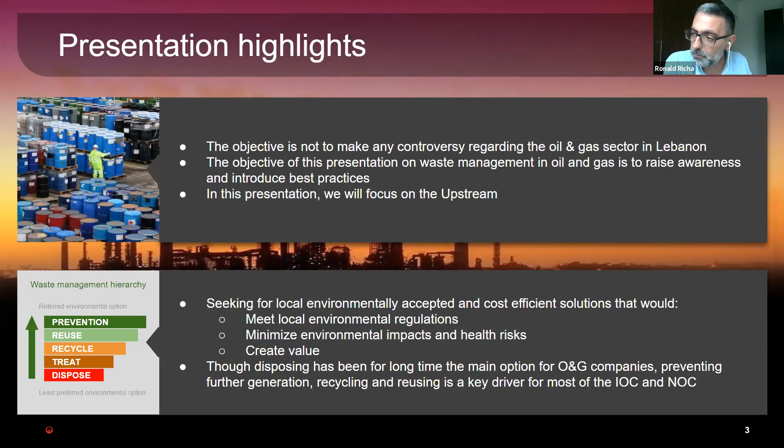So these are the fundamentals, the principles I wanted to start my presentation with before I address the rest of it. What is the oil and gas value chain or oil and gas sector? There is the first, what we call the upstream. The upstream is the exploration and production of oil or of gas.

This is where we have these oil fields or gas fields, where the oil companies, whether national oil or international oil, you can see all these rigs and all these wells, oil wells, where we go very deep to extract the oil or extract the gas. This is what we call the upstream. It could be conventional or non-conventional.

Then when it's extracted, this oil or this gas should be treated. When I say treated, cleaned. We have to remove the salt, we have to remove from the oil the water, other type of things. From the gas, we have to remove the sulfur, we have to remove other type of impurities. And this is what we call the middle or the midstream.

Then we have the refining. So there's the storage, then the refining, where we start separating the different molecules inside the oil and recombining them. Then we have the petrochemical, and then we have the chemistry. So oil and gas, it's a very, very large definition. For each and every step of the oil and gas sector, we can find specific challenges linked to waste management, linked to water management, specific environmental challenges.

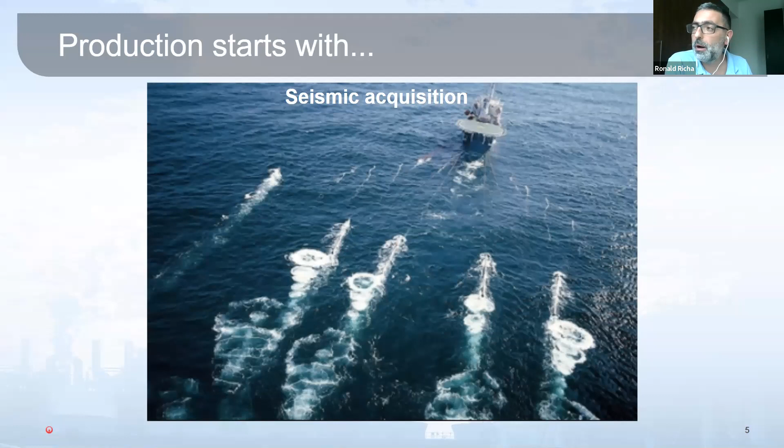First things first, a quick reminder. Everything starts with the seismic acquisition. It's all technologies consisting of sending shock waves in the soil layers and having probes to capture these shock waves and to analyze how these layers in the soil are composed. The porosity, the type of rocks, the type of reservoirs, the densities, and so on. So this is the seismic acquisition, and this is what has been done in Lebanon.

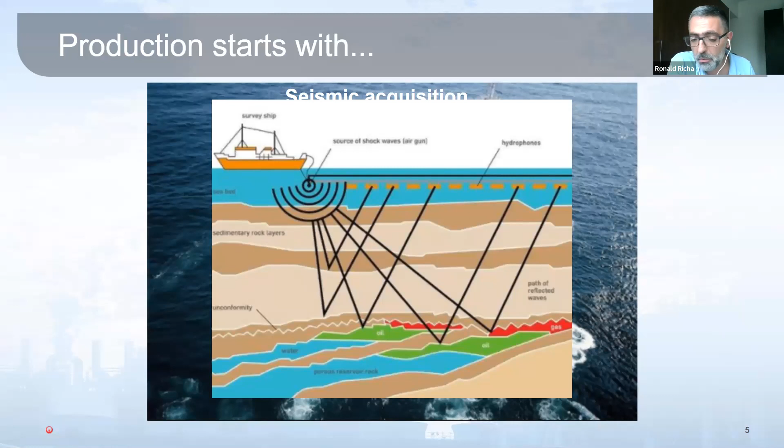And it gives a probability. It shows that, yes, in this area, there might be a reservoir. And this is where geologists come and have a lot of theories and start doing some studies about the geology of the land, and when it was made and so on. But nothing happened until the exploration started. Why am I saying that? Not because I want to focus on oil and gas. All these steps mobilize a lot of people and equipment and products and consumables and so on. So they generate a lot of waste.

This waste could be general waste, because there are people. For example, onshore, I've been involved in the development of one onshore field. At a certain point, there were 15,000 people in the development of this field. So all these people, they have showers, etc. So they generate general waste, but also to develop an offshore, there is the drilling, and we'll talk about the drilling. There's the fracking process.

The fracking process consists of fracking the rock in order to extract gas. There are a lot of processes that can involve either water or other types of chemicals and generate water or other types of waste. So these steps are important to understand, and to understand what happens during these steps in order to be able to address the waste that can be generated and treat it.

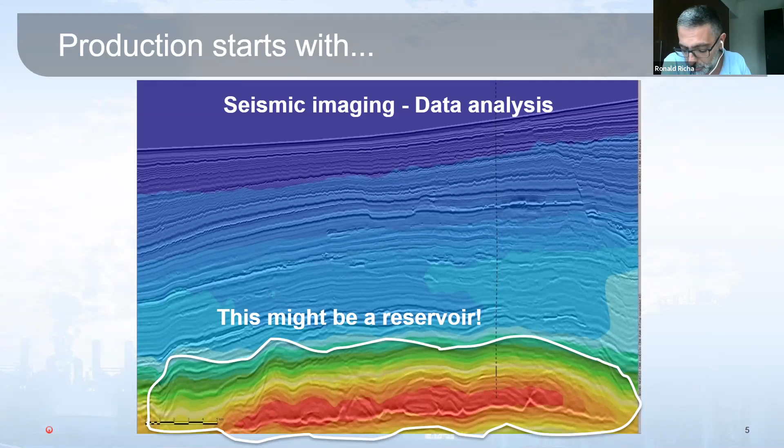Then the phase of exploration starts, and with the phase of exploration starts the drilling. We'll talk about the drilling later on. And we discover gas or we discover oil. So we start managing the reservoir. We manage the reservoir by injecting gases and water to keep the pressure and to enhance the pressure, and by using pumps and by extracting the oil and the gas. So these are processes that most of the time use big quantities of water and different types of water.

There are a lot of technologies in oil production, for example, where we maintain the pressure of the reservoir by injecting water. The water could be fresh water. It could be salt water. It could be what we call the low salinity water technology. So we have to prepare a kind of specific salinity water and inject it. It could be steam. So these technologies could use huge amounts of water, and can have a huge environmental impact. When you say using water, it means pumping from a water aquifer or lake or river or whatever, and producing a lot of water that could be polluted.

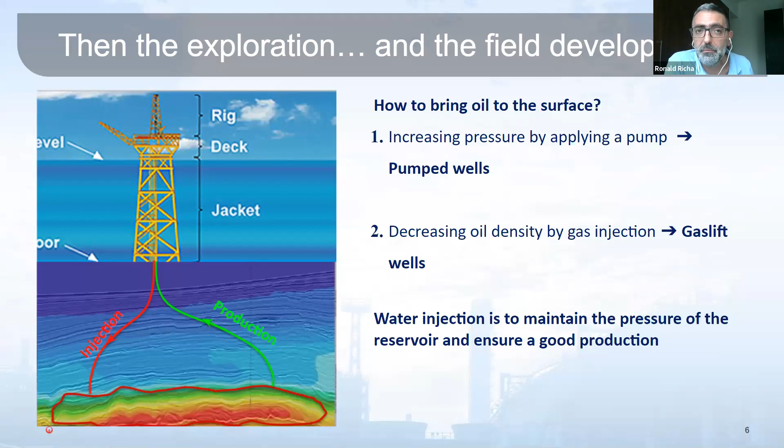So basically, these are the main principles. Now, if we come back to the drilling process, the drilling process is a complex process. The principle is simple, but the drilling itself is a very complex process. Because first of all, it could be vertical and horizontal. It can take any direction. Second, it can go very, very deep, 1,000, 2,000, 3,000 meters. Even more sometimes in non-conventional areas, but also it involves many things at the same time,

which is the head of the driller that is crushing the rock. Inside the drill bit, we inject mud. This mud could be oil-based or water-based. This mud has three roles. The first role is to control the temperature at the drill bit. Since there's a lot of friction, there's high temperature. The second is to stabilize the well so it doesn't collapse. So this is why we put in this mud some specific components like bentonite, for example.

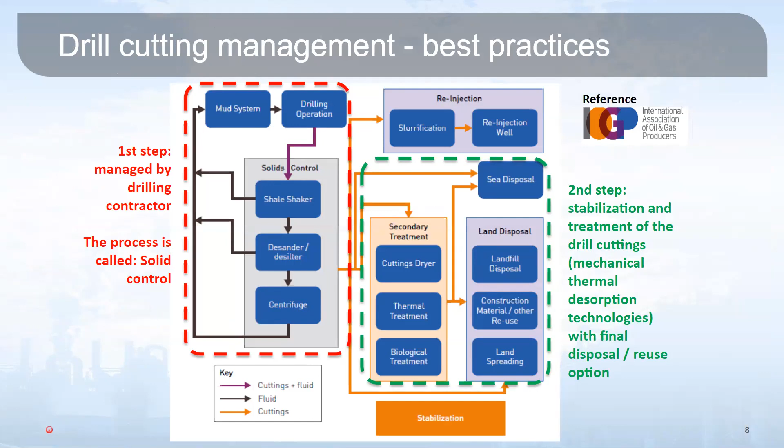And once treated, it's a little bit technical, but what I wanted to show you is that we can reduce the quantity of mud by recycling this mud in a closed loop, and whatever remains in terms of rocks, cuttings, and so on, we can use a technology called thermal desorption in order to clean this solid matter and make something out of it. In Veolia, we have a lot of experience in that, and we mainly produce construction material out of it.

The bentonite that we put inside the sludge is a very fine material with very good characteristics. It's a kind of clay. It can create smooth surfaces. So we use it as a construction material. We use it for parking lots, for a lot of things, but we need to stabilize it. It can also be used as fillers for roads and for embankments and so on.

We also have experience where we created bricks out of this kind of material. There are a lot of things we can do with it, and a lot of opportunities for the treatment of such material. First of all, in terms of lowering the environmental footprint, and second, in terms of producing these byproducts and sometimes selling them or giving them for local use.

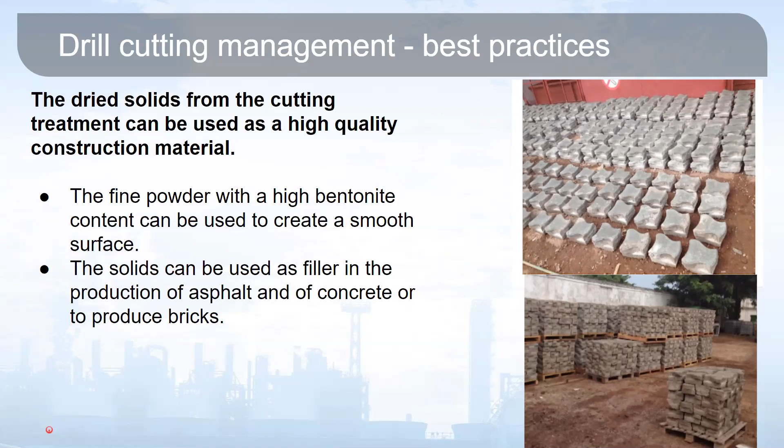The second interesting and challenging aspect, and I think not a lot of people know about it, is what we call NORM. NORM is the terminology for naturally occurring radioactive material. Yes, there is some radioactivity that we can find in oil and gas. We're not talking about nuclear bombs, and it's not everywhere.

It can be in some specific fields, depending on the earth layers, the earth crust, and the presence of these radioactive elements that are naturally present in the earth crust. In all the earth, in all the layers, there is some radioactivity.

The problem starts when we have this accumulation phenomenon. In the exploration phase and in the production phase, we are extracting the oil, and with the oil there are sands and soil that come out. All these components go to what we call GOSP, the gas oil separation plant.

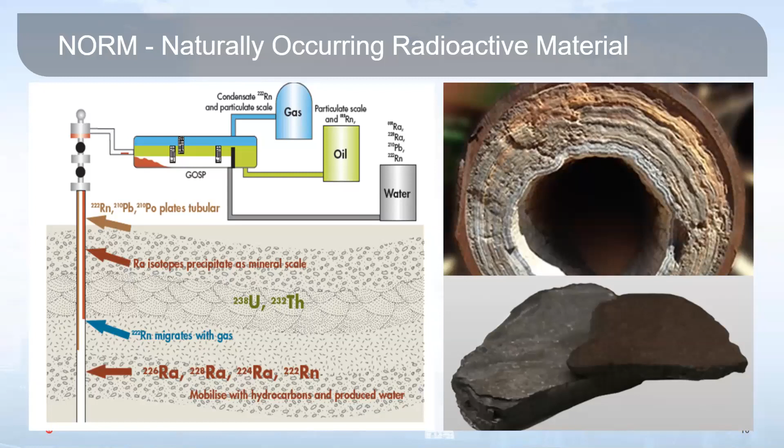This is where we separate the oil from the water and from the gas. There's also a solid fraction, and everything goes through pipes, and scales are developed in these pipes. These scales are exactly the concentration phenomena where we concentrate the radioactivity, and after a certain level it becomes dangerous for people.

Radioactivity is a matter of radiation, times time of exposure, times the type of radiation. So if it's very low radioactivity, in some cases just a few becquerels, it's also a matter of exposure. If the same person is exposed over a long period to this radioactivity, it can be harmful for them.

This is where oil and gas companies, and we can see it even here in the Middle East, companies like ADNOC and others, are very concerned about these challenges, and they have put in place specific solutions to detect, monitor, and treat this radioactivity inside the pipes and all types of equipment. This is more and more recurring as we go very deep, into different soil characteristics and so on. We can have radioactivity, and over time this radioactivity will become concentrated and become harmful.

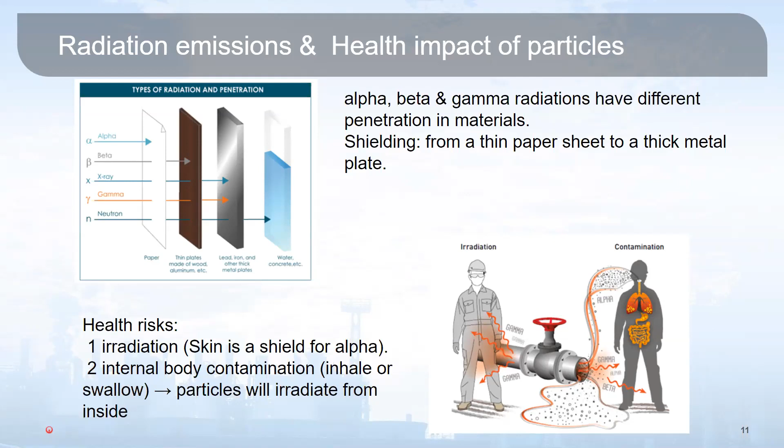So what are the solutions we bring in this case? First of all, there's monitoring. We need to measure, we need to see what the level is. The World Health Organization has defined some thresholds. Once again, we're talking about very low radioactivity, but there are thresholds that the WHO considers as challenging, as could have some harm and generate risks to people exposed over a long-term period.

So we start by monitoring, by testing and segregating what is contaminated from what is not contaminated. Then we protect our people, for sure. Like we see today with COVID-19, there are protections to be taken. So for radioactivity, same thing.

Then we descale, we treat. As we saw before, the radioactivity is on the scale, so we try to remove the scale, we try to concentrate it, and we try to treat that equipment to bring it back to the oil and gas producer. We concentrate the sludge, or whatever comes out of this radioactivity, and we dispose of it safely, or we incinerate it. This is another challenge we can face when we talk about oil and gas. It's not systematic, it's not everywhere, but it could be the case in several fields.

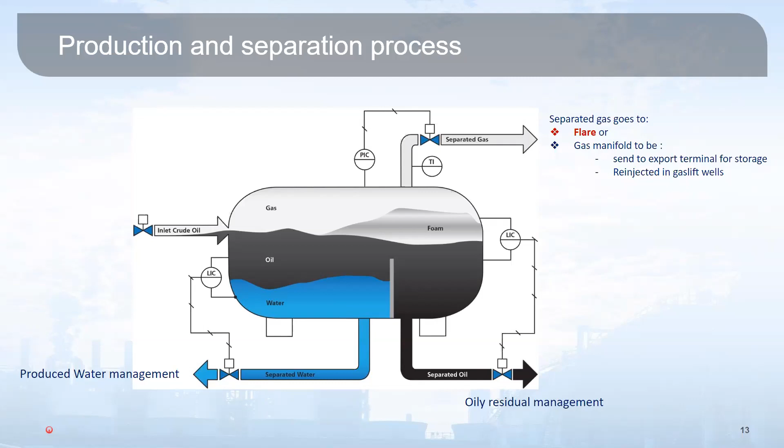Yes, there's water coming out with the oil, and sometimes there's a lot of water coming out of the oil, and this water needs to be depolluted, and we need to find something to do with the water, because you might see in some cases a huge amount of water coming out. And we have the solid part, which is the sludge.

For the sludge, there are a lot of solutions, and the sludge could be generated in the GOSP, or could be generated also in the terminal, in the tankers, in the tanks, or storage. There's a lot of technologies and ways to deal with the sludge. What's important, first of all, is to separate the water from the solid from the oil.

This is what we call the tricanter technology, or centrifuges. Once we separate them, we can send back the oil to the oil and gas company. We can use the soil, send it to thermal desorption, for example, and use it as construction material. And the oil could be treated and used for other purposes.

There are others, mainly in refineries, Veolia has developed different technologies and expertise in order to use the different phases of the sludge inside the refinery and reduce the quantities of solid to be disposed in landfills. Because, as you know, almost everywhere in the world, the cost of landfilling is picking up. It's becoming more and more expensive to send waste to landfills, and this is why oil and gas companies are trying to find alternatives, not to send waste to landfill, and try to recycle on site.

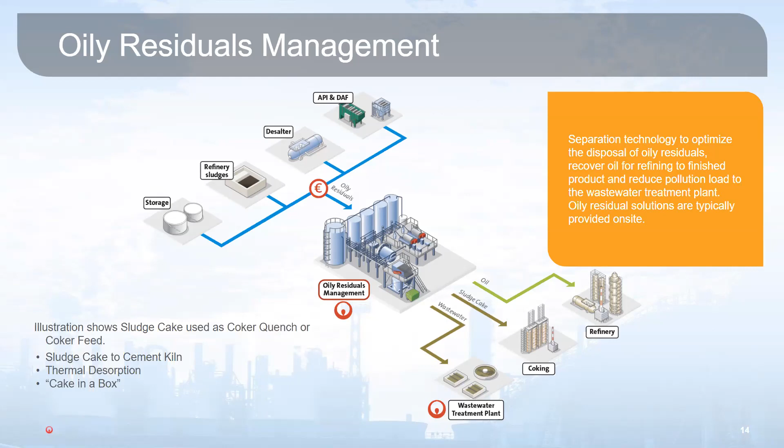So this is for the produced water, and I find this very interesting. For example, the closest to us is Oman. In Oman, what is the water to oil ratio? It's the quantity of water that we produce every time we produce 1 barrel of oil. In Oman, the water to oil ratio is today around 20. So for 1 barrel of oil, Oman produces 20 barrels of water.

I was in a conference one year ago, and there was a CEO of one leading international oil company saying, are we oil producer or water producer? Because there are some fields, some aging fields, that are producing much more water than oil. And they need to find a sustainable solution, because this water contains a lot of contaminants - oil, other contaminants, and sometimes high quantities of salt and big amounts they need to deal with.

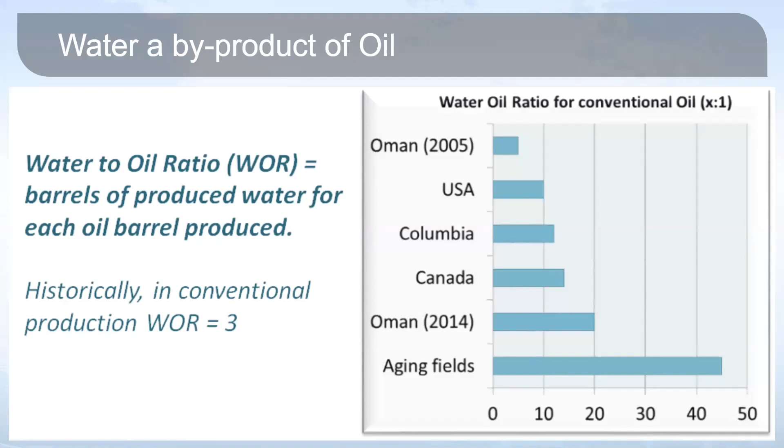So if we consider today the overall worldwide production of crude oil, around 80 million barrels per day, with a water to oil ratio of 3, roughly 40 million cubic meters per day of water. If we consider that in 2030 the current fields will be aging and producing more water, roughly 500 million cubic meters per day of water will need to be managed. 500 million cubic meters per day is the consumption of 2 billion equivalent inhabitants.

It doesn't mean that we'll take this water and send it to people to drink. No, that's not what I want to say. I want to say that it's a big challenge that the oil and gas companies are facing, and will be more and more facing - what to do with all this water, how to handle it, and is there any chance to recycle it and put it back in the fields.

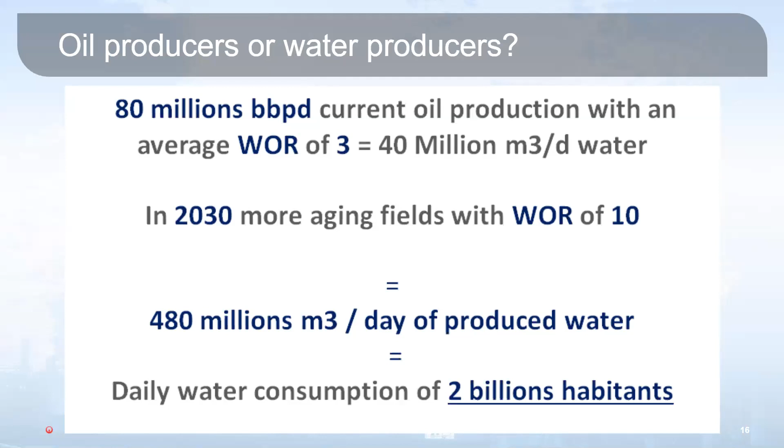So basically, yes, water is needed in oil and gas. As we said, it is used to inject and keep the field under pressure in order to produce. Produced water has to be handled in a cost-efficient way. And the quantities of produced water, increasing due to the aging of fields, is a challenge that oil and gas companies are looking to address, and Veolia is working with them closely to address it. I hope Ghassan will present a few solutions we're able to bring.

We need to find, with the oil and gas companies, a way to close the loop locally. This is also a principle in recycling - closing the loop on a worldwide level is never an option. It could be a temporary option, but we always need to close the loop locally. Yes, water is valuable. Most places where we have oil, we don't have water, so it's valuable, and we need to find a solution.

In terms of takeaways, I'll put myself in the shoes of the oil and gas company. Being able to manage waste efficiently will also impact their production efficiency. In terms of cost, it's increasing. The environmental challenges are more and more stringent, and therefore costs are increasing. As you can see, a week ago, the price of a barrel in the stock market was around $7 or $8 - it doesn't even cover the basic production cost. So if we add the management of water and waste on top, it needs to be handled efficiently and in a cost-efficient manner.

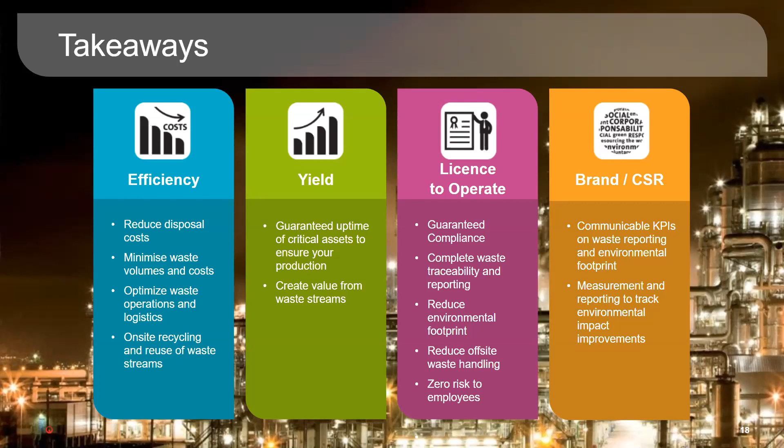That's it. Thank you very much for your attention.

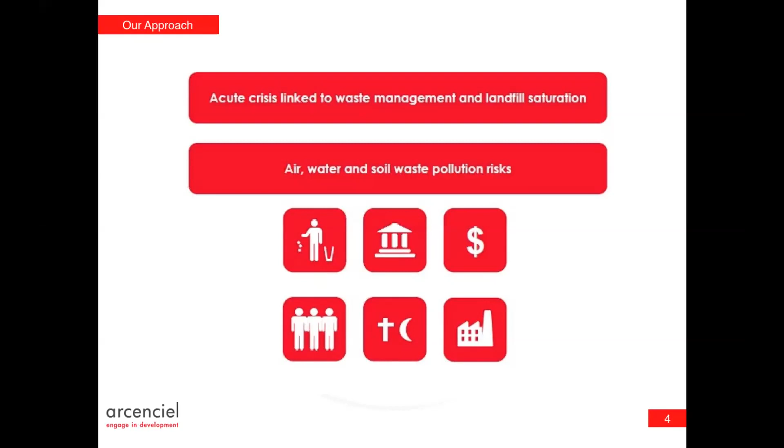And of course, we have a lack of funding, mainly I'm talking about the municipalities, the Union of Municipalities, and the public sector as a whole. So all these taken into consideration allow us to work on a very precise and small business focused on infectious waste. Why could we work on this and not have a lot of competition on it? Because the point of having a successful entrepreneurship is to focus on core business, precise, and very small. And the point also of entrepreneurship is to make the competition really irrelevant and to work at the lowest cost possible.

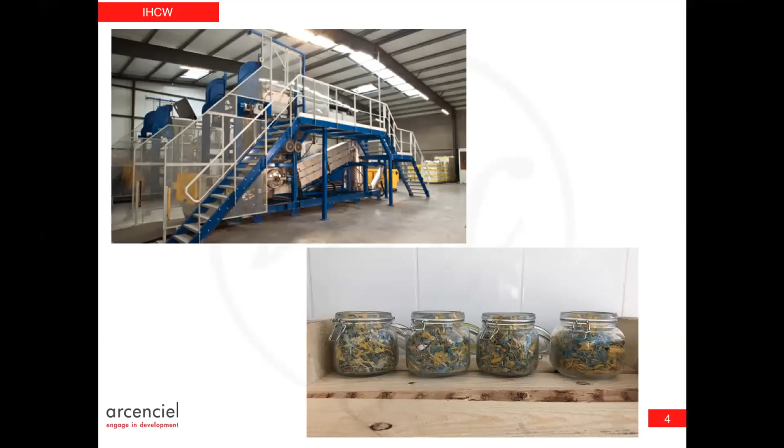The second project we worked on, we also focused on a core business, precise and small. It started with the rolling cap project that enabled us to work on the awareness part on sorting at source, collecting caps, and adding an added value to it, which was providing a wheelchair to a person in need after selling a ton of water bottle caps.

So we are treating in terms of recyclable waste around 1,500 tons a year. We did around 24,000 collections during a year and served around 1,300 clients all over Lebanon.

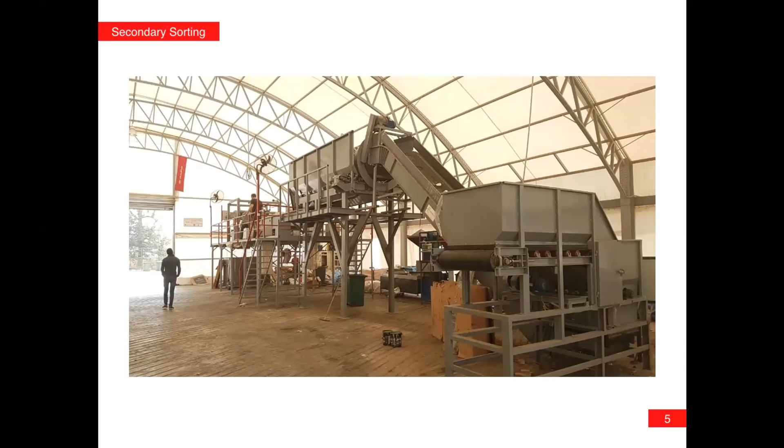This led us to the project we did in Bickfaya, which was the first secondary sorting facility during the 2015 crisis that was implemented and created for the waste management of the municipality of Bickfaya and the villages surrounding this municipality.

And this project now is being optimized through a funding from the European Union in partnership with an Italian municipality called Sestri Levante, and an Italian NGO named COSPE, as well as the municipality of Mahdia in Tunisia, and the Center of Research in Tunisia named CITET.

So we are working on optimizing this composting drum, which was produced locally, and all the spare parts and maintenance are locally provided. And this drum can be adapted to the needs or the capacity of each municipality depending on the quantities generated of waste.

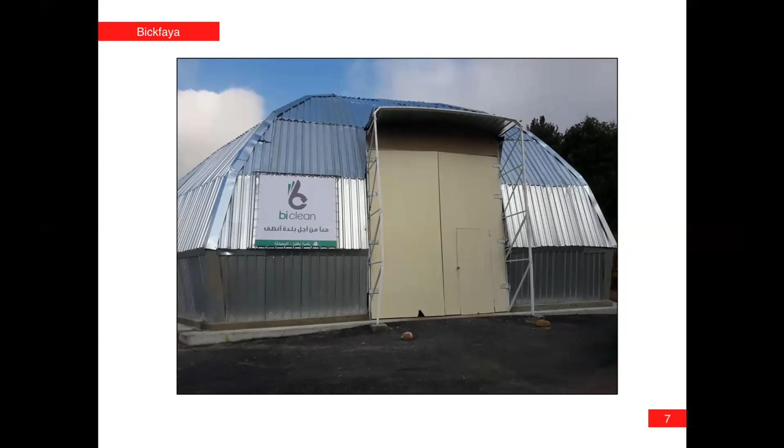And you have this sorting facility, the secondary sorting facility, capable of treating up to 16 tons of recyclable, clean, pre-sorted waste. We also worked on several projects, among which a baseline assessment that was developed in partnership with the European Union, LDK, which is a consulting environmental agency, and the Union of Municipalities of Zahrani, involving 18 municipalities, and of course the Ministry of Environment, where we managed to develop a baseline assessment specifying the categorization, the typology of the waste generated within this area.

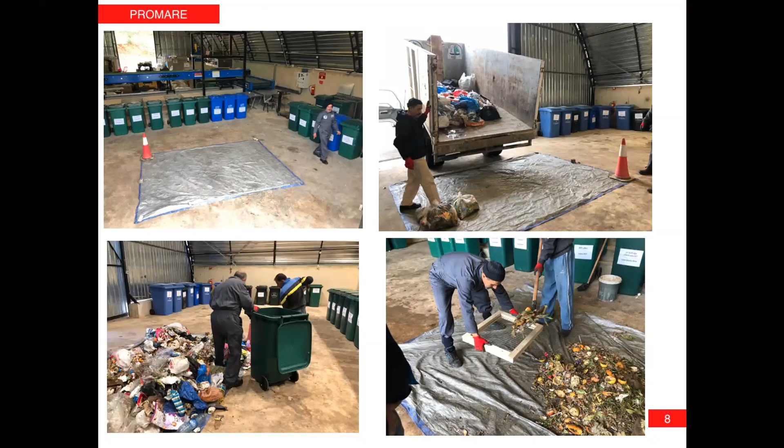So as you can see, in this chaotic country, opportunities are huge, are humongous, especially with the bad management of the government or of the public authorities in most of the sectors. Waste is one of them, unfortunately. And the most important thing is to focus on a core business, very precise, very small, away from the competition, in order to help the people where we will be implementing the project, try to protect as much as we can the environment around it, and also create jobs and generate some profit to sustain the activity and the project that we've implemented. I will stop here and we'll be waiting for your questions.

Thank you, Mario, for your intervention. It was very interesting. So we are running out of time. We have around 2 minutes for answering the questions. Let me share my screen. Yeah.

Okay, so I'll combine these 4 questions. Basically, there are some clarifications after some of your statements regarding the environmental impact assessment and the strategic environmental assessment. They are saying that the EIA is publicly available with comments, and the SEA has been made for the O&G sector, and it is also made nationally. And regarding the oil and gas sector-specific regulations, health, safety, and environment was tackled, and the regulatory index for hazardous waste exists nationally. Okay, just a quick comment regarding this, to be very, very brief.

I mentioned these points before because we took part in the bidding for the treatment of the waste generated from the oil and gas activity in block number 4. And when we got the bids, there was just mentioned waste management with no specific types or criteria or norms on how to resolve or dispose of the waste generated from these platforms. And there were a lot of local actors who were working without permits, who have pyrolysis or so to process oil and sludge, etc. They had their way of contact with public authorities to adjust their situation and accordingly get the required permits in order to take part in this sector.

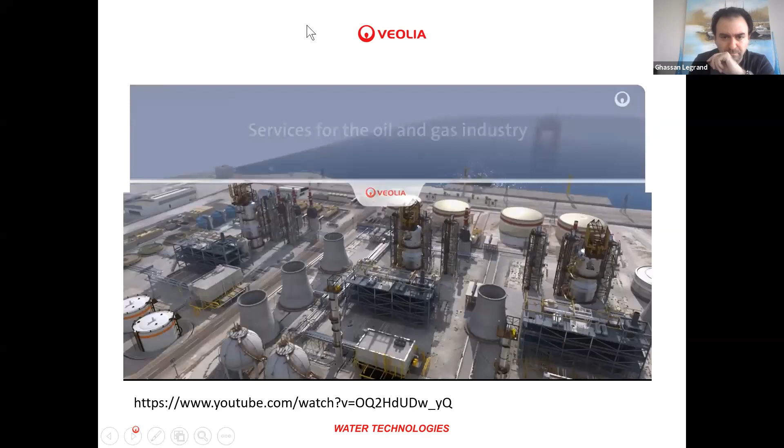Improving access to resources while preserving and replenishing those resources is what we do at Veolia. Each day at oil and gas production sites or refining plants, we treat and reuse water, we supply utilities, provide industrial services, reclaim byproducts, and treat hazardous wastes. By doing so, we contribute to optimizing the operating costs, increasing efficiency, and reducing the environmental footprint of the oil and gas industry. Here's how and why at a glance. Upstream, the extracted oil and gas can contain an important volume of produced water. This water is separated from the hydrocarbons, treated and in most cases re-injected into the reservoir to increase oil and gas recovery.

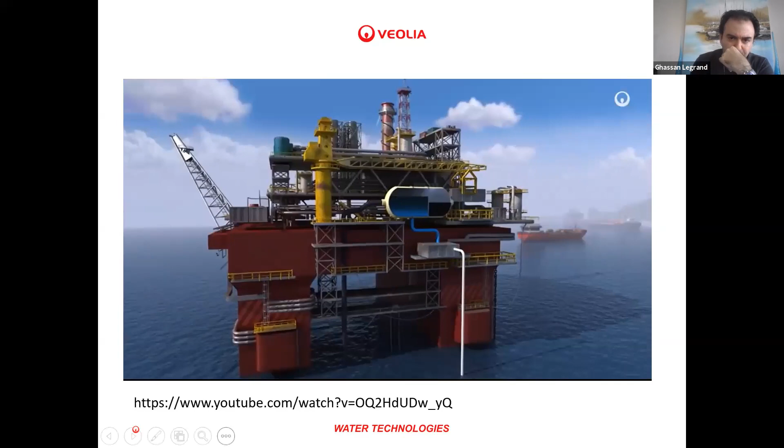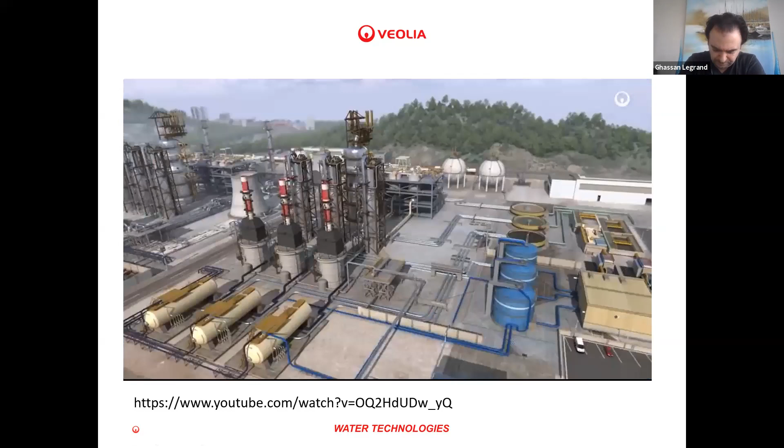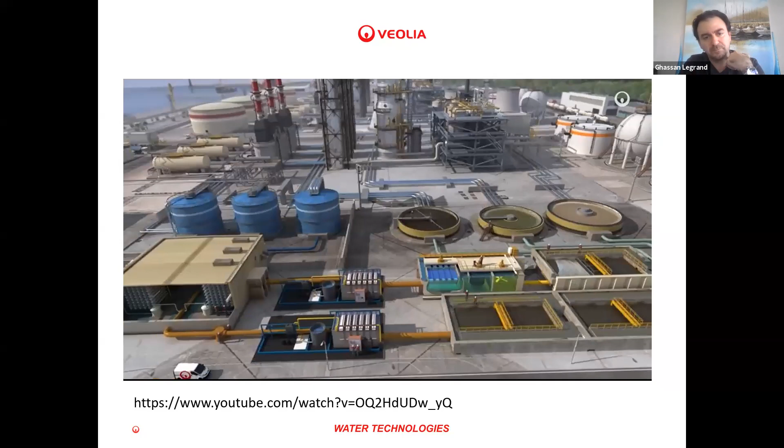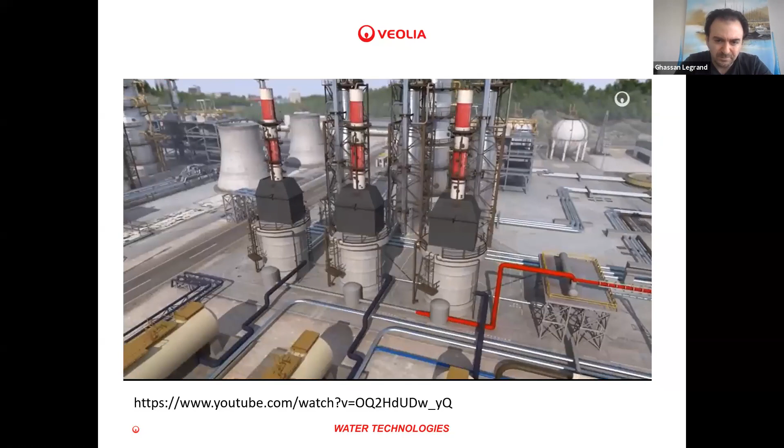Downstream, the refineries that turn crude oil into fuels, lubricants and other petroleum products use large amounts of water and steam. They also generate a lot of wastewater, for example, oily water, sour water or blowdown water. Depending on its quality, wastewater is separated and treated at an on-site wastewater treatment plant. The treated water is then recycled in various ways, the objective being to reach lean water usages up to a possible zero liquid discharge. It can be used as wash water, for example, to remove salt and sediments from crude oil. It can also be used in boilers. Here it is heated to generate steam that is then conveyed through heat exchangers or pipes for various purposes in the refinery. This water also feeds the cooling towers that regulate the temperature in these units.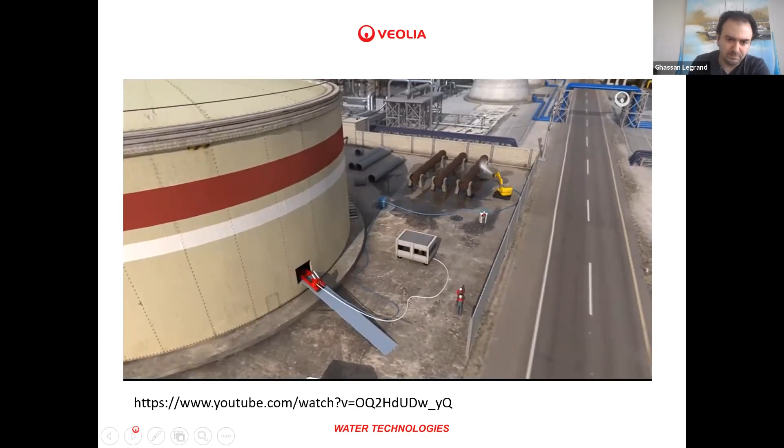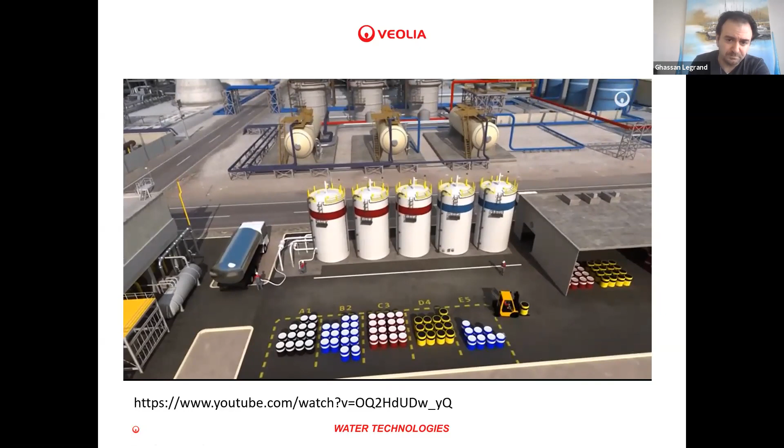Lastly, it can also be used to clean tanks, heat exchangers or other industrial facilities. For safety reasons, these complex operations can be fully or partly automated. The oily residues and other hazardous wastes from refining operations are transferred to special waste treatment facilities where they are processed and safely disposed of. Useful byproducts can also be reclaimed from these wastes: solvents, sulfuric acid and other chemicals. This circular management of resources allows for reliable operation of oil and gas facilities and increases performance while meeting environmental standards.

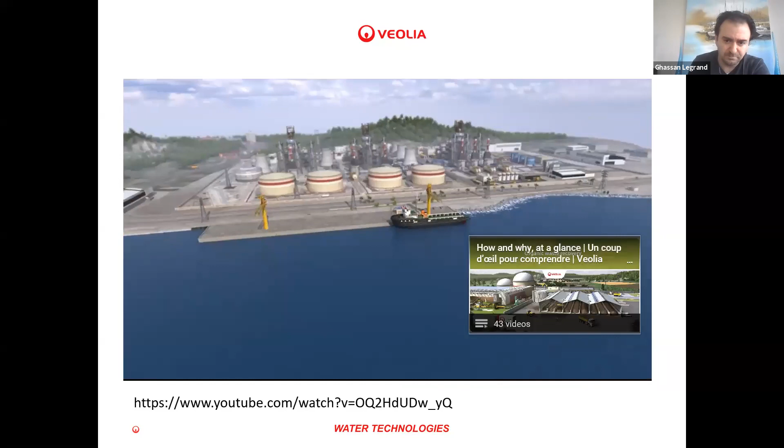Okay, so this video summarizes a little bit where we find water in oil and gas, and to continue this presentation, it's important to set up a few keywords like upstream. You hear a lot about upstream and downstream. So upstream, whether for oil or gas, is what is related to the production of oil or any liquids under the ground, so in the reservoir. And downstream, to make it simple, is all the rest, so what is related mainly to refining and petrochemicals. So we will talk a lot about upstream and downstream in the presentation.

So since we are talking about oil and gas, it's important to know where the market is for this. As you know, a lot of the world's oil reserves are mainly in the Middle East and North America, as well as South America. The consumption is mainly in North America and in Europe. Production today is around 90 to 100 million barrels per day, and 6.6 barrels is around one cubic meter.

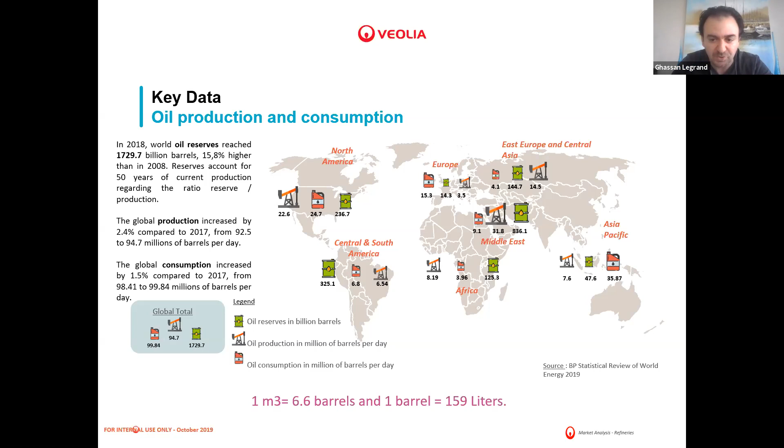For the gas, it's roughly the same. We see the reserves at the same place. So Middle East has a lot of reserves. We add to this Russia, where they also have important reserves, I think 20% of the reserves of the world.

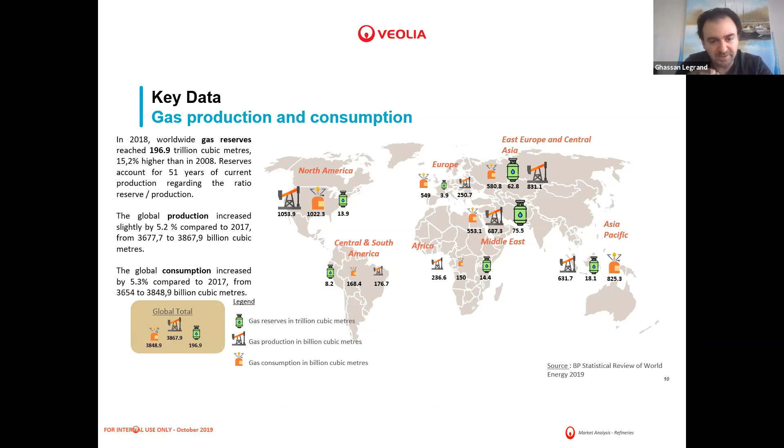And it's important to set this up to see where the production is and where the consumption is, because it's also related to the transport of these resources.

This is closely linked to water, because if the oil price is high, companies will invest more in water treatment, since the cost of treating a barrel of water will be low compared to the oil price. This is very important because we talked earlier about regulations. If regulations are tough and the oil price is high, many companies will be interested in treating water to reuse it. So we find a direct correlation between the oil price and water treatment projects for reuse.

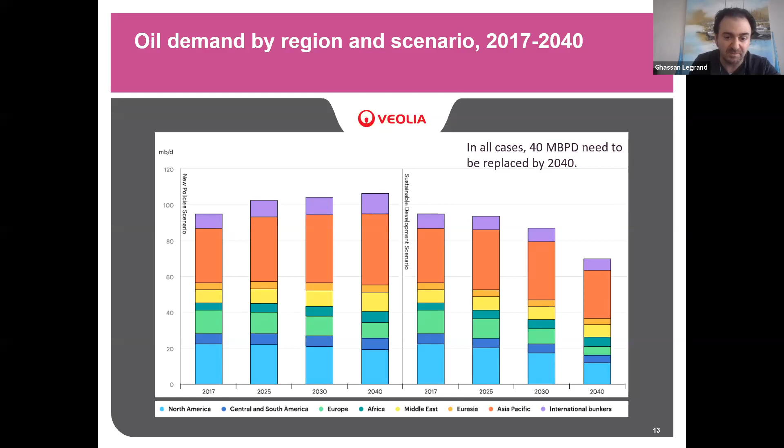Ronald mentioned this very quickly. The WOR in our business, we talk a lot about water to oil ratio. As you know, the world is producing 100 million barrels of oil or equivalent oil per day, but the ratio of oil production to water is between 3 and 5. That means we have today between 400 and 500 million barrels of water produced from these wells. It's huge.

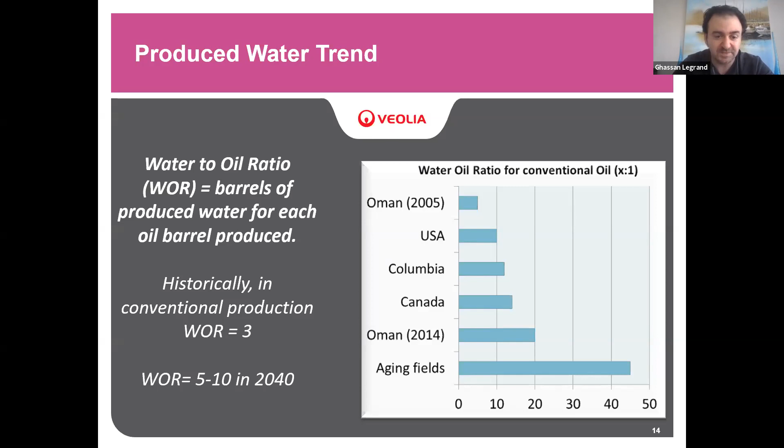So today in 2020, we are producing around 400 to 500 million barrels of water, and we predict that with aging fields, this ratio will go up to perhaps 10 within the coming 10, 15, 20 years. That means if we continue producing 100 million barrels of equivalent oil, we'll produce 10 times that in water. So it's a huge resource.

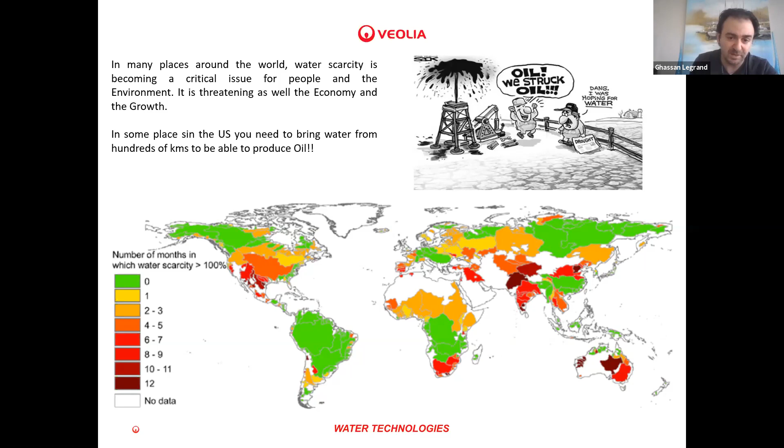As we mentioned before, some oil companies are asking themselves if they are water producers now or oil producers. This is very important for their production, because without water, there is no oil. When you look at water scarcity worldwide, water is mainly taken from rivers, lakes, and wells to inject into reservoirs to increase oil production, while we could take this water from the water already present in the reservoir, what we call produced water.

So to go back to upstream, today we can of course produce. It's split into onshore and offshore. And in Lebanon, we talked a lot about what will be happening there. The main production in Lebanon will be offshore.

I heard a lot about regulations, risk, and reputation in Lebanon, because pollution there was not always very well managed. At the same time, I'm very positive because we are in the Mediterranean Sea, and like many oceans and seas, there are certain regulations. So we cannot do in Lebanon whatever we want. That's one thing to keep in mind.

And the second important point is that oil production companies like Total, who are exploring today, and perhaps others who will join in the coming years, cannot accept to link their name to any leak or pollution in the Mediterranean. So these two points make me positive about this industry, of course, if we find oil or gas in Lebanon.

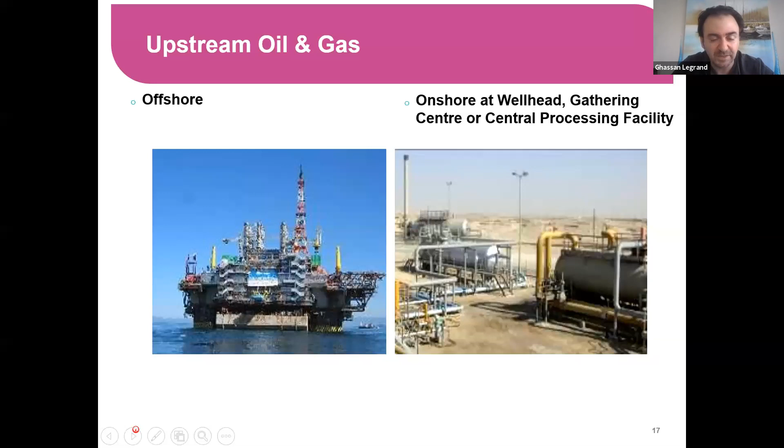So where do we find water? It's a very simplified reservoir. If any reservoir engineers are looking, they will be laughing, but it's roughly because we don't see the levels like this. All of this is mixed, and the reservoir is like a rock.

As we all learned in school, water is heavier than oil. So normally we find the first level, which is water, followed on top by oil, and of course the gas, which is on top. So it's like a straw when we start producing.

That's the second level after what's happening now in Lebanon after exploration. So we'll start producing the oil. But as I said, it's never like this. So of course, this oil will come out mixed with water, mixed with gas.

And when the reservoir is aging, this level will increase. It will go up, and the oil level will shrink. And of course, to make the level of oil come up easier and keep the pressure on the reservoir, normally we have other platforms injecting water.

This water can come either from the sea when we are offshore, and that's the easiest place - you have a lot of seawater - or you can treat the water which is coming out from the reservoir to inject it, because of course you cannot inject the same quality of water.

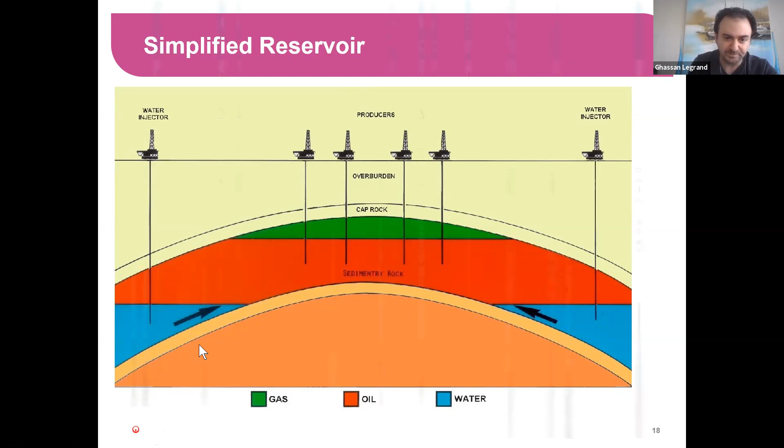So very quickly, not to go into details, when you produce oil from the wells, you start by washing the oil with water. The easiest thing to take out, for example salinity, salt from water, from oil, is to wash it with water. So it goes into different steps of treatment, separation, and in each step you are separating oil from sediments, from water, from gas, and you collect all of this water.

Of course, this water you need to treat it. Ronald talked about waste, because you have sludge coming out and different waste as well. Us in oil and gas, we have technologies today. We have the possibility to treat this kind of water. And by the way, any kind of water can be treated - it's all about the cost you want to put in the barrel or cubic meter of water.

For the gas, it's roughly the same. What you need to keep in mind is that in gas, the levels or quantities of water coming out are much less than the oil reservoir. So this is good again for Lebanon - in gas, we don't produce a lot of water, much less. So the size of the installations are much smaller than what we find in the oil.

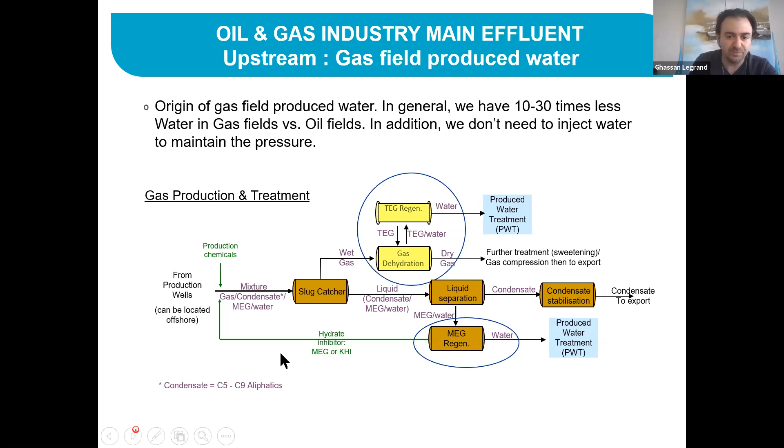So when water or the liquids in general, hydrocarbons and water, come out from the reservoir, of course we find water, but this water is mixed with hydrocarbons, with solids, because you have also sediments, you have sands, you have dissolved solids like the salt, you have gases, you have all the chemicals you injected in the reservoir. So all of this comes out, and all of this needs to be treated.

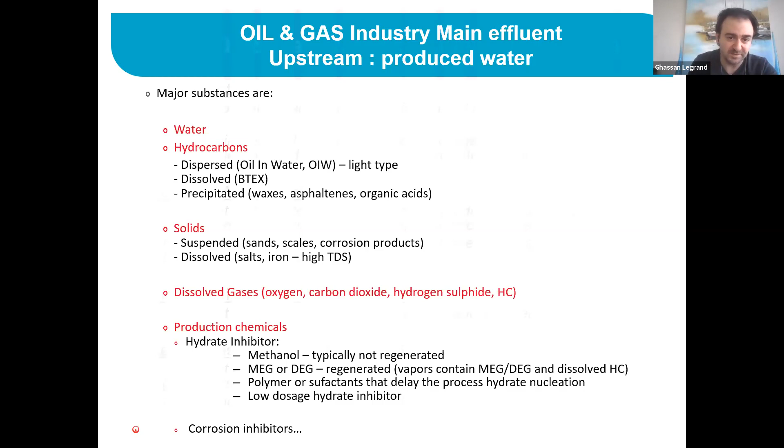Now, this water coming out, what we call produced water - this can be treated to be back to the reservoir. That's the easiest use for the water. We need to inject it, so either this water is injected, or you need to take water like the seawater to inject it. It has also its own pluses and minuses.

The minuses is it's water which has a certain level of salinity, so it's important to treat it and take sulfate from it. If not, it will clog and plug the reservoir.

We don't have shale gas for the moment in Lebanon, but you heard about this in the US. Shale gas also uses a lot of water. And then we mentioned this as well, so we can use the water to create steam, because some of the oil in some places, like in Canada, in Venezuela, the oil is very heavy, and you need to inject steam to make it more liquid, if I may say.

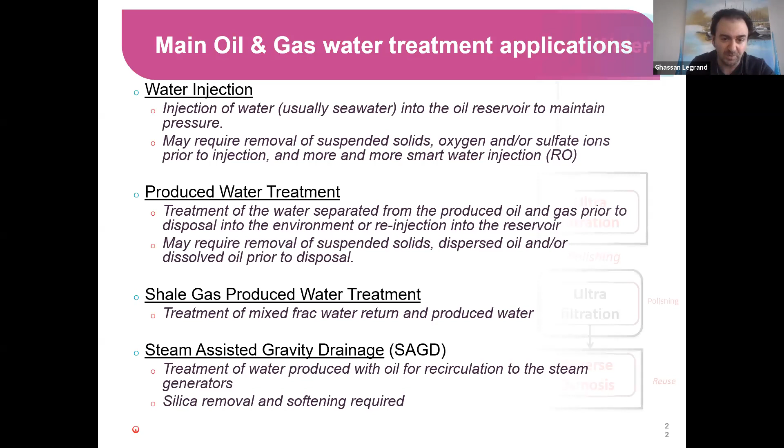Depending on the water and the quality of water, you have different types of treatments: primary treatment, secondary treatment, or tertiary treatment. This relates to the pollution or contaminants we find in the water. If you need to push the quality of water, treating low levels of oil or TSS, you need to add different steps of treatment. I won't go into details today.

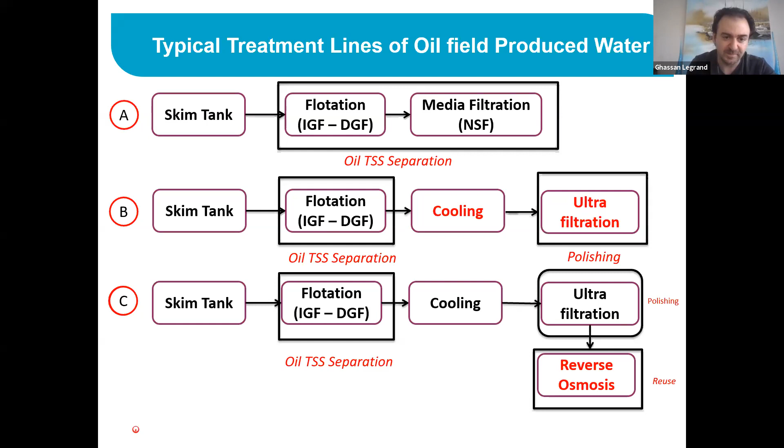For gas, we also have certain technologies, because the contamination found in water coming from gas fields is different. Since it's gas, some pollutants move very easily between the gas level and the water level, more so than between oil and water. So we find them in the water, which is not the case between oil and water.

Some of these contaminants found in water from gas fields need special treatments. Today at Veolia we have, I think, the best technology available in the market - the only technology which can take out benzene, toluene, and xylene, which are very difficult pollutants found in water.

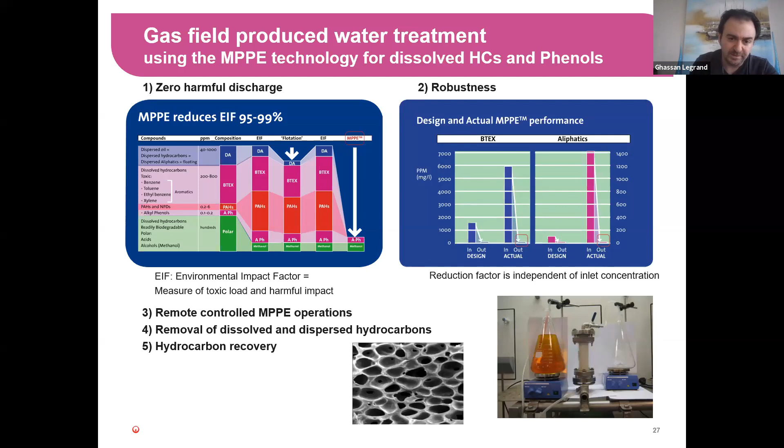We normally find this in what we call floating LNG. I'm mentioning this because it's something that could come to Lebanon. If we find gas, perhaps we will produce it offshore, but we don't need to send it onshore to be treated or liquefied. It's much easier to transport gas when it is liquid, and by liquefying it at minus 162 degrees, you substantially reduce the volume.

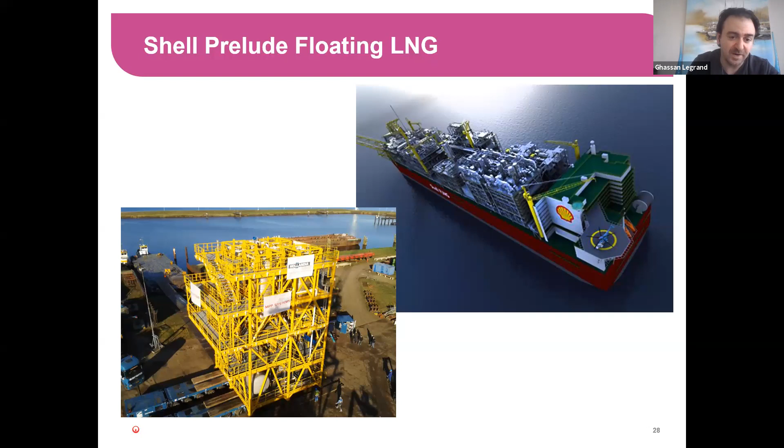So perhaps the solution in Lebanon could be floating LNG plants, like the picture you can see, where gas is produced and liquefied offshore, and ships can come take it from the floating LNG platform and transport it abroad to be gasified again. These are some of the projects we did.

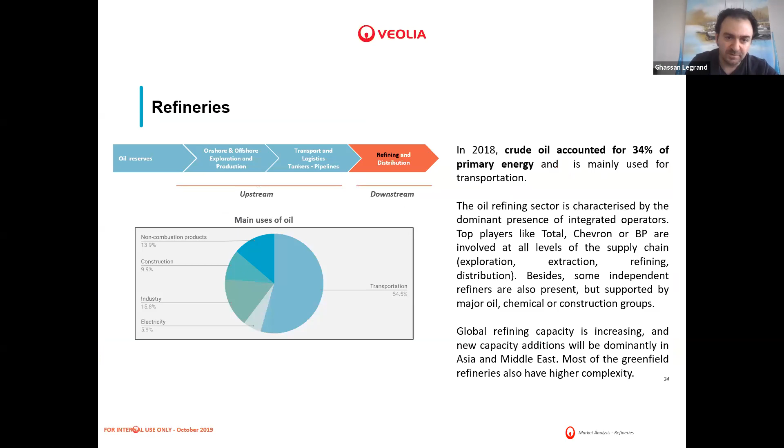For the downstream, very quickly - that was the upstream, where we produced the oil, produced the gas, and treated the water. Then the oil, or the gas but mainly the oil, goes to refineries. Today the refining market is huge worldwide, with more than 600 refineries. I'll go quickly - when the oil arrives at a refinery, it's raw and needs to be treated again.

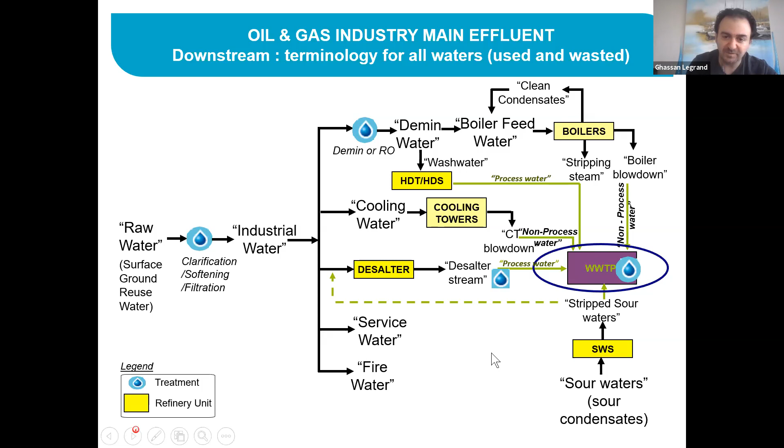Water is used a lot in refineries, and at the same time the refining process generates water too - what we call wastewater. All this water is collected in the wastewater treatment plant, and that's where our role comes in again, taking out all the contaminants from oil and particles through different steps: primary, secondary, tertiary.

Today in some places in the world we go for zero liquid discharge. In Qatar, for example, we built a few years back the biggest zero liquid discharge facility - no more liquids coming out. Everything is treated, and if there's waste coming out, it's not liquid anymore, not injected or sent to the sea or ocean. It's solid. Of course, this costs a lot of money.

The main things to take away today: without water, there's no oil production. That's a very important point. And oil companies are changing how they look at water - it's no longer a problem, it's a resource to help increase their oil production.

The maturity of reservoirs is a huge problem we're facing today, and will face more and more in coming years. I mentioned salinity briefly - the problem with mature reservoirs is that with age, the quantity of water increases, but the salinity is huge. As you know, seawater salinity is between 35-40 grams per liter, but here we sometimes have water coming out at 150, 200, or 250 grams per liter of salinity.

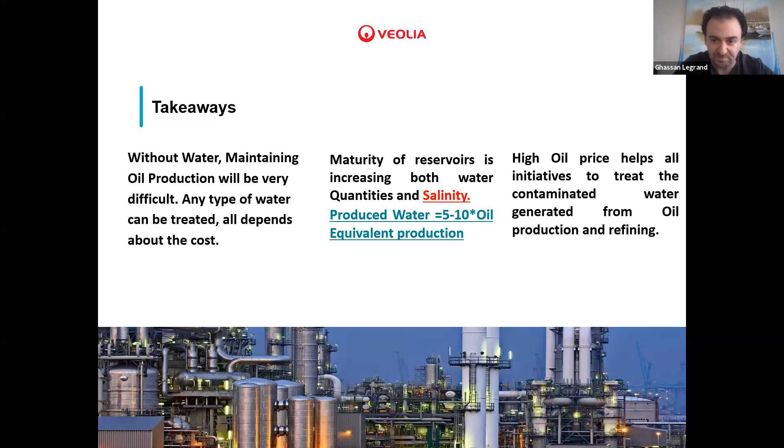And it's actually a very interesting topic because usually when we talk about or mention clean technologies, we directly think about renewable sources of energy, wastewater and waste management. But most of the time, we miss that we can make the oil and gas industry even cleaner, and there is lots of room for managing the waste and the wastewater coming out of this industry. So it was really a very interesting topic.

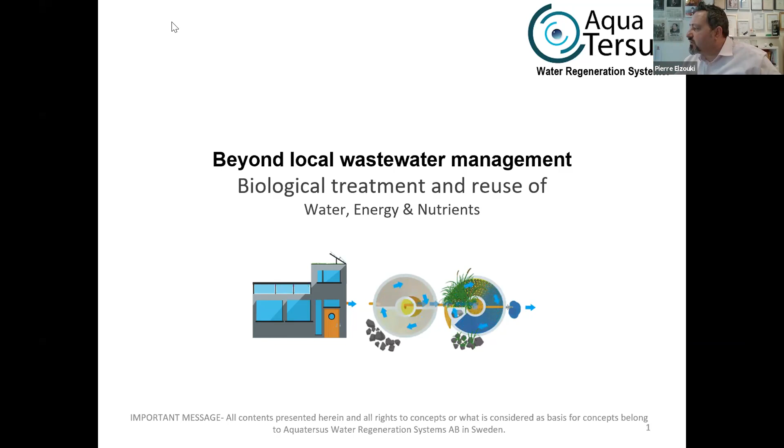But basically what we do is we look at water, treating wastewater, but we look at the steps beyond that, which is treating the water, reusing the water and the energy and all the nutrients in the water. Let me see here if I can go. So,

I live in Sweden, as I said, the red dot up there. My background is as an entrepreneur; I have a technical background from the Institute of Technology, Telecom. And about year 2000, we had the hype about internet and the dot-com era. All my friends wanted to work for big corporations. Well, I thought I want to do my own thing.

So I started a company called Scalado together with a friend, and we looked for the next thing, not internet, but mobile internet. We boldly said that internet will come into your mobile phone, which at the time had a monochrome screen. You will be able to see TV and radio in your mobile phone, which at the time was extremely crazy. Nobody believed in us, but some did.

So what we did at that time is we created technologies and packaged them as software development kits, which means tools. And we provided these tools for telephone manufacturers and said to them, with these technologies and these tools, you can handle images. So basically you can zoom into the image, create panoramas, 3D effects, make all kinds of things.

So if you had a Sony Ericsson, Nokia, Motorola, HTC, Samsung, or whatever between 2003 and 2012, 2014, chances are big you used some of our technology, because we embedded this in over 2 billion mobile phones. In 2012, Nokia acquired this company, and then Microsoft acquired that division. So that technology lives today in the environment of Microsoft. And I made my exit together with the other shareholders.

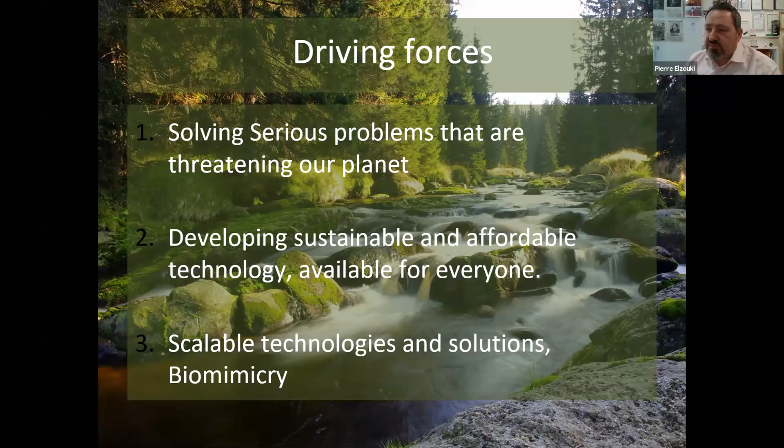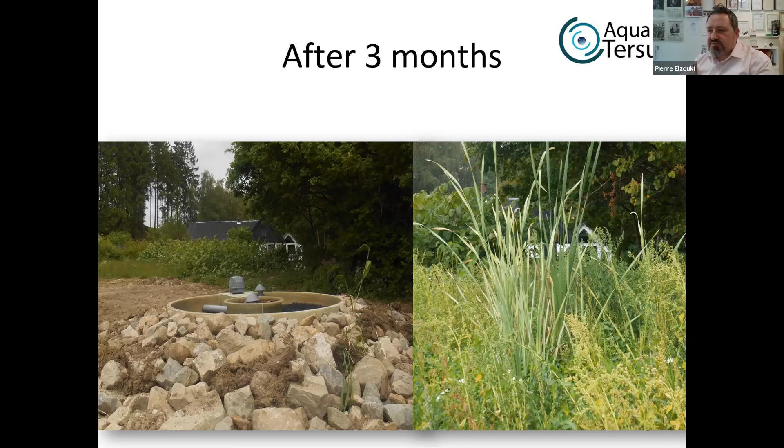That's where we are. What we can see is the barrels are dug down in the earth, and when you're finished, you don't see anything. You just see the place where you have your plants. And when these plants have got this sewage water, which is rich in nutrients, the plants just grow like crazy. So in 3 months, you don't see where the system is. It's underground and you cannot see it. So it's in total harmony, living in the ecosystem as part of the ecosystem, and that's part of the success.

So how do you look at water? Well, it is crazy in Sweden, but also in most places in the whole world. The tap water is the drinking water, and we use that to drink, but we also use it for showering and for flushing the toilet. So why should we use drinkable water to flush the toilet?

And some people who can afford it can have the clean water, and the other people who cannot afford it will use other quality water also for drinking and all of that. So our aim here is to make sure that the water will last more for more people. So you don't use that for flushing and showering and all of that. So how do we do that?

So you jump into step number 2, where the sludge is broken. And for that, we have chambers and environments where anaerobic microorganisms do their job. We call it climatization and good environments. Step 3 is our final product at this stage, which is purified water. We use the aerobic microorganisms and plants to achieve this.

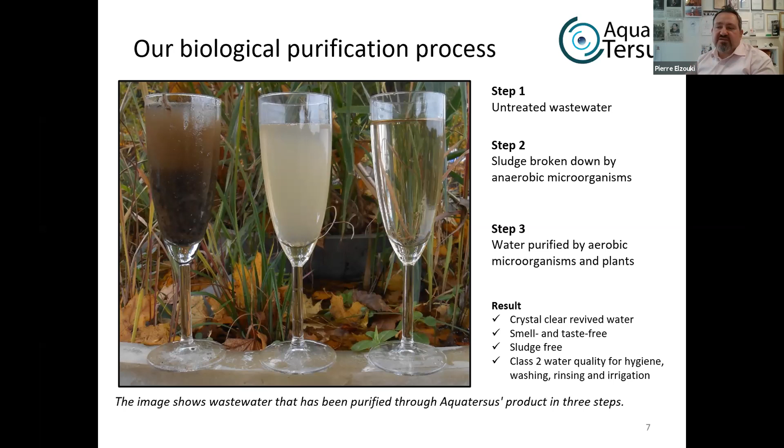And what we get in the end is crystal clear revived water, as we call it. It's almost smell-free, almost taste-free, and of course, the best thing is that it's sludge-free. There's no rest products in this. The water itself can be used for many things. You can use it for irrigation. Now you can water your lawn. You can do cultivation or whatever.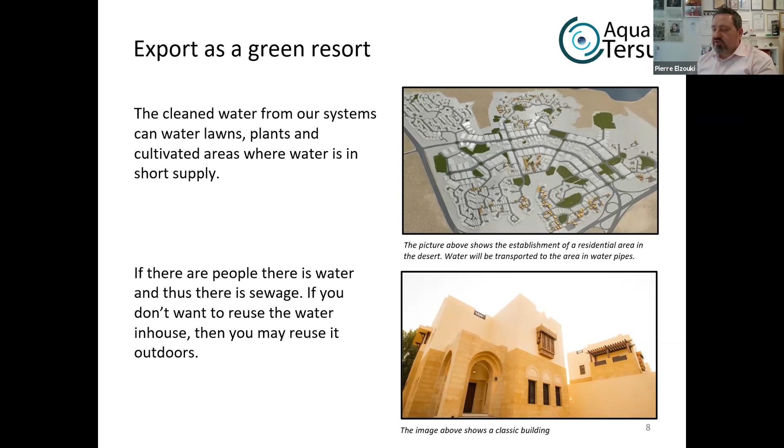So that can be used in any place in the world, including the Sahara or any desert place where the water scarcity is huge. So if you have people, you will have sewage. If you have sewage, you have water, and then you can reuse the water. That's basically putting it very simply. So we want to achieve a level of 90% of saved and reused water.

We also save energy that converts into terms of kilowatt hours or carbon dioxide emissions. We will lower that very much. There are many reasons for that. We save the nutrients by fixing them or extracting them. Fixing them in, let's say, vegetation, plants. Extracting them is where we can sell them for other purposes. This will create business models, looking at new jobs, subscriptions, and all kinds of things.

The system is modular. It's fully scalable from one household to many households, or a small town, but it is scalable, so it can handle many more people. The best thing with it is it's biological and fully sustainable in these terms. So how can we use it? Let's look at different contexts when we talk about circular economy and sustainable economy.

Here is an example. You have a house where you have, let's say, 100 people. The average water consumption in Sweden is about 200, 215, 220 liters per day, but the average in Europe is 180. So if you have 100 people times 180, you will have 18,000 liters per day, or like 6,500 cubic meters per year.

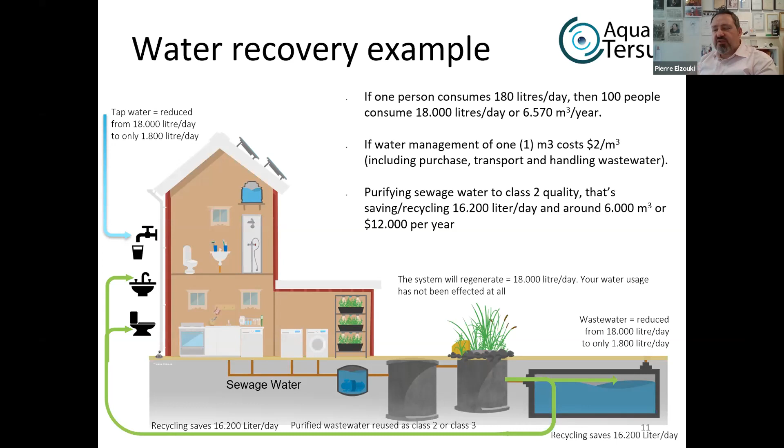Now remember this, you can take your shower once, twice, 5 times a day. We don't prohibit it because you are just showering with reused water. So there is no waste of water. You can shower 20 times a day. We're not prohibiting or changing any behavior, habits. Okay, next thing, how can we use the water in other places?

So as a business developer, we're looking to see how we can collaborate with partners. It's all about partnerships. So here is an example. We're making test beds. Of course, this system has been embedded in several places, but then we look at the next phase, which is the digital bioeconomy, as we call it.

And that's a project we're doing with the Swedish Environmental Protection Agency, where we take this sewage water and purify it to such a level that it keeps its nutrition, and then we grow or cultivate with it. So you can use hydroponic cultivation, aeroponic cultivation, and aquaponic. Aquaponic is where you have your fish involved, but aeroponic is something new. There is a new innovation here in Sweden.

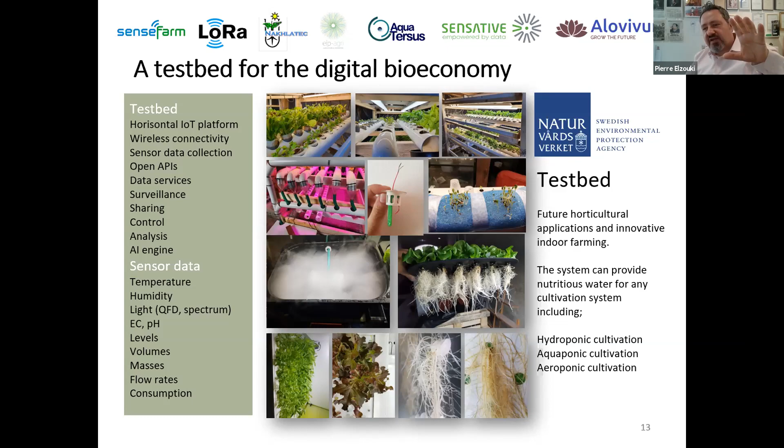And the good thing with aeroponic cultivation, a technology that can be used indoors in your basement, or actually in a box in your home, in urban environments, is that you use a minimal amount of water, but you cultivate it, you have climatization, the temperature, the light, and all of that is perfectly orchestrated, so to say, to get the perfect growth of your salads, tomatoes, whatever you want to have.

We live in southern Sweden in an area called Ideon. I want to introduce Ideon for you. There are about 10 to 12,000 employees here. All kinds of technology have been brought from here. And there is another interesting potential partner for you, Cleantech Scandinavia, and also the United Nations Office for Projects and Services. They have 2 offices in the world. One of them is here in Lund, and they are looking to support all kinds of great ideas. They actually announce projects and challenges, and you can apply for that. So I just want to mention it.

So Ideon, the research park, compared to the Lebanon Berytech, is a bit older. It started in '83, but in Sweden, in this small country, and also in this small town in Sweden, which is about 80,000 inhabitants, including 40,000 students from all the universities, there is a lot of innovation. At least in my research park here, 3,400 patents have been patented. And the things that came from this research park are Bluetooth, Nicorette, the inkjet printer, and so on.

Here is Cleantech Scandinavia, where they're also open for collaboration with Lebanon, and we can invite you and collaborate, open our database with over 2,000 innovative companies here in the Nordics and the Baltics. There are investors that might be interested for you. So this is just an opening for us.

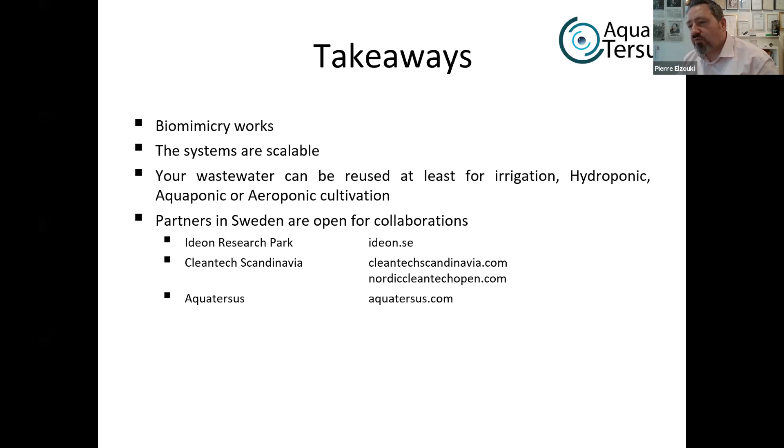Okay, so the takeaways. We have tried to copy nature, and we have proven that biomimicry works. The system can go from one household and be very scalable. Your wastewater is a very, very important resource, and you can use it at least for irrigation, as we said, hydroponic, aquaponic, or aeroponic. There are some partners, and we have learned a lot from working with partners and all these kinds of collaborations.

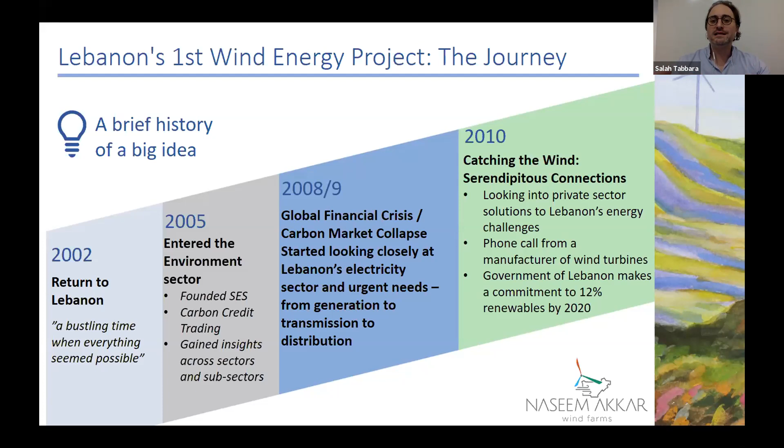But for our viewers, we all know everyone has a small idea, or a big idea, about Lebanon's troubled electricity sector. It's really sad that post the civil war and until today, we haven't been able to find a sustainable solution to a bleeding that has cost the Lebanese a lot.

...around 3,500 megawatts. Obviously that delta was catered by the private generators. People living in Lebanon know exactly the pain they go through because they have to pay 2 direct bills, without talking about the opportunity cost - we'll get to that maybe at a later stage. When we look at that, you have around $5.3 billion getting out of Lebanon in hard currency, to the private generators who are buying the fuel, and to EDL, whose fuel is being subsidized by the Lebanese government.

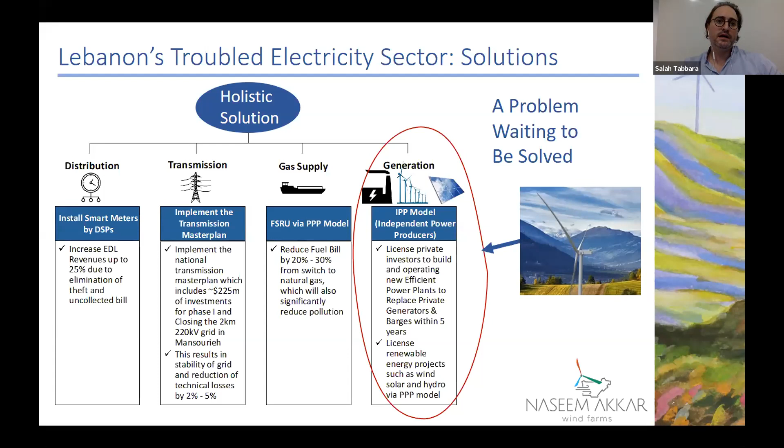Now, with what's happening in the world today, the price of oil has seen record lows. This in the short term will have a direct impact on Lebanon's fuel bill. But obviously this is not sustainable, which is why the solution has to be holistic.

So in 2011, back to our story, I had to do a small presentation about the state of Lebanon's electrical sector. In 2011, there was a eureka moment again, because the UNDP released the Wind Atlas for Lebanon, showing the proper corridors available in Lebanon for us to eventually erect these farms.

Like a lot of entrepreneurs, we took that study and started looking for appropriate lands all over Lebanon. Initially we started in Akkar, in the plains of Akkar, but because of the civil war in Syria that started in 2011, we had to find a different site, moving from the plains of Akkar to a mountain/ridge area to implement this project.

In 2012, as part of its commitment to 12% renewables by 2020, the Lebanese government and the Ministry of Energy launched the first EOI, expression of interest, for the first wind farm project in Lebanon. Our company was one of 4 companies who submitted for that tender, and 3 companies went to the next round.

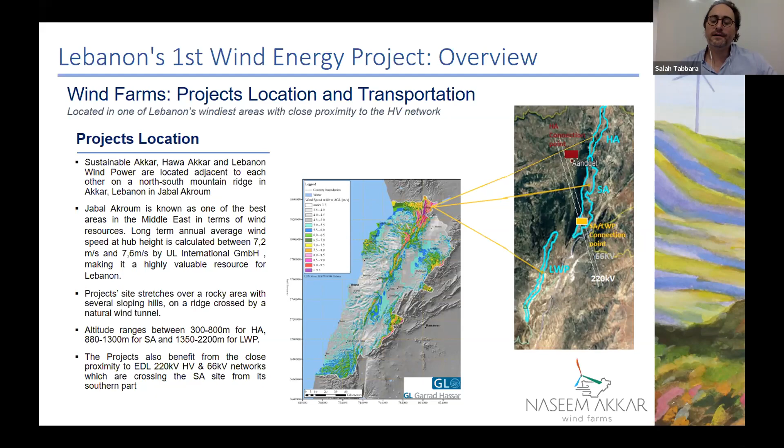So in a couple of words, once these three projects are operational, they'll eventually be giving electricity for in excess of 200,000 homes all over Lebanon. We did a tender, because we're a private company, where we invited 3 international companies to take part, and General Electric, GE from the US, was the winner for the 3 projects.

Interesting figures that I would like to discuss. Yes, there will be around 43 turbines installed in these 3 projects: Sustainable Akkar, Lebanon Wind, and Hawa Akkar. We will hopefully have more visibility on the impact of COVID-19 on the commercial operational date, but we're targeting November of 2021.

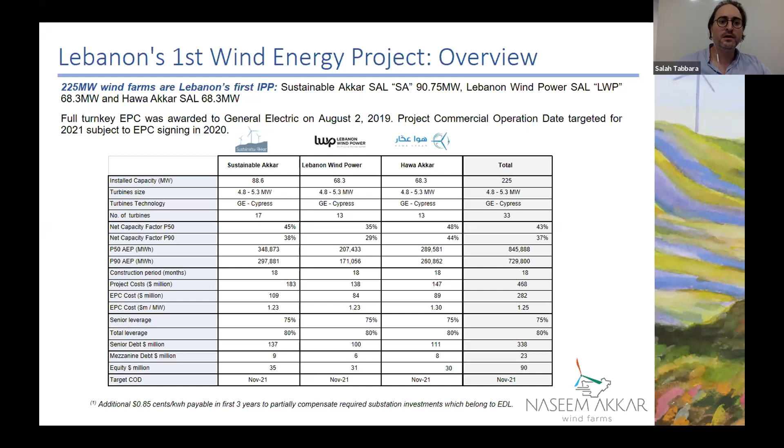The benefits of this project, we like to call it a cornerstone for the new Lebanon. There's a romantic side to the story. If you have 100 people sitting and discussing this project, I can guarantee you 99 out of 100 would say this project is never going to happen, while the last one says you guys are crazy for doing this.

But we really believe this project could be a case study for all upcoming projects between the private sector and the public sector, and we have a responsibility to make it work. After 10 years, it has become a personal commitment to see the light after that long journey.

So we are in discussions with 4 international financial institutions that will support us with 85% of the debt. We're getting fresh US dollars into Lebanon from 4 institutions: DFC in the US, the European Investment Bank from Europe, FMO from the Netherlands, and hopefully IFU from Denmark.

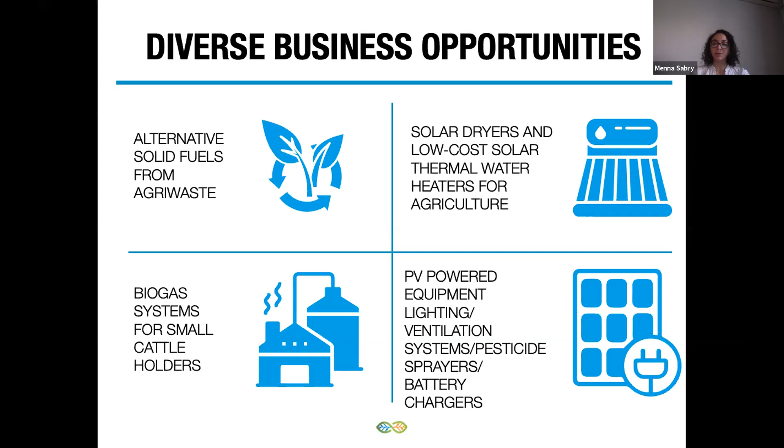The biogas units for small cattle holders can be sold to small cattle holders to produce thermal energy to replace natural gas or butane tanks in water heating. Also, PV powered equipment like lighting or ventilation systems, pesticide sprayers, battery chargers. These are devices to be sold like self-powered equipment with diverse applications.

Also off-grid photovoltaic and PV pumping and power applications. These are very important to the agriculture sector, or to produce pure water for domestic uses or irrigation, where the available water contains large amounts of salt. Also off-grid hybrid PV systems. These are systems that are off-grid and aim at providing the farm with electric energy for general uses, in a complementary manner with electric energy generated by diesel.

So other findings, we've worked with these 20 startups to understand their business models and to understand what kind of problems they are facing in order to sell PV systems to farmers, whether small farmers or big farmers.

And we wanted to understand also the market barriers to increase or to enlarge this market and to activate it. So the first part, which was the most pressing, is the absence of effective customer finance mechanisms, which creates capital burden on PV startups. So in general, renewable energy systems usually require the customer to commit high capex upfront with the promise of payback in the form of energy savings.